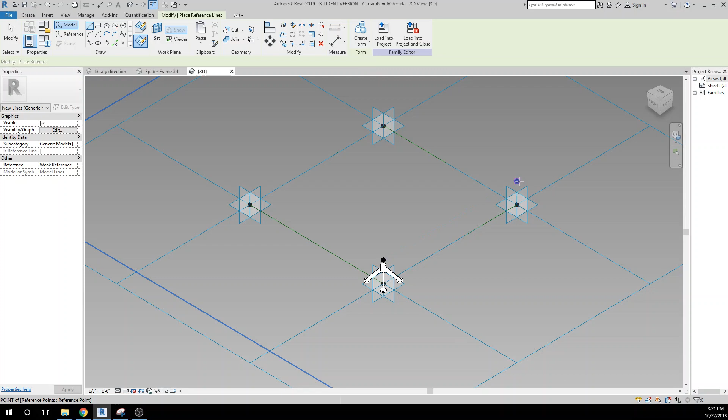Set the reference plane, place the point, grab that point, offset it by 1.5 feet. Sorry about that. Alright, and then we'll connect those 2 points. So I'll set a reference plane and then draw a line that's a reference line between those two. Let's zoom in now so we can look at making our extrusion.

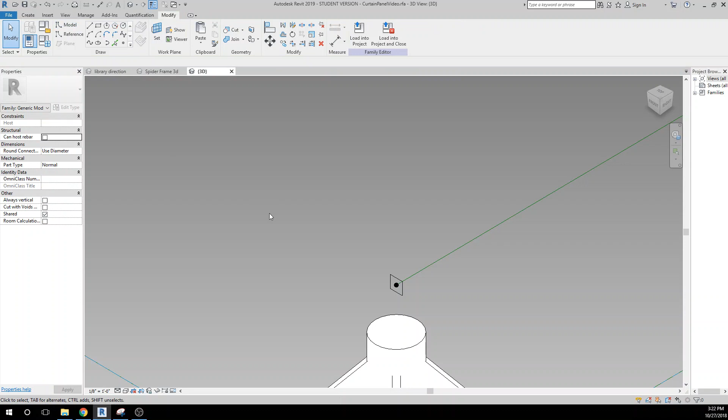We'll go ahead and set a reference plane at the end of that line. I'll zoom in a little further. And we'll make a 4-sided polygon that's easy to locate on the end of that point. And we'll make this only a 1/2 inch wide. That'll make it 1 inch nominal thickness all the way through. That's a 1/2 inch in diameter basically.

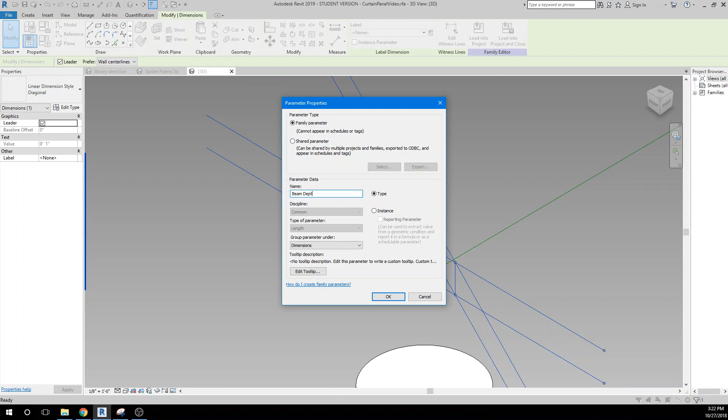We want to make this parametric. We want to be able to change the size of its steps. So first of all, I'm going to move it till it's sitting on the point. And then I'm going to grab this top and click on the dimension to make it a hard dimension. Select that dimension, and I'm going to give it a parametric value that I'm going to call beam depth. And I'll make that an instance parameter.

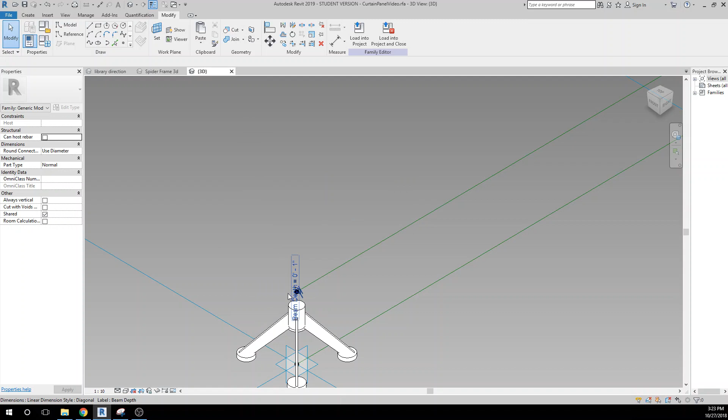And I'll just click that off, and you'll see the text is really large. The way to adjust that is just to take the custom scale tool and make this a really large drawing so those graphics become a lot smaller. And let's just check the performance of our beam depth. Let's give it 1 foot instead of 1 inch. Apply that, and you'll notice it moves up.

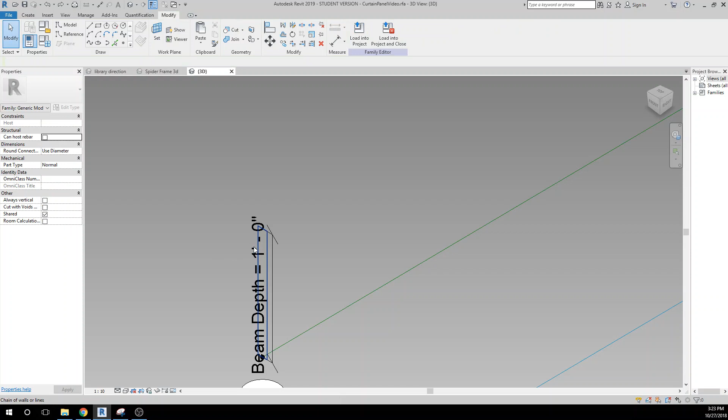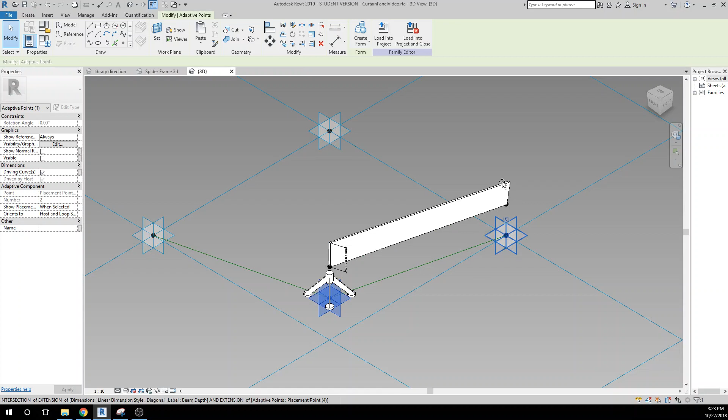So let's go ahead now and grab the, well, I'm going to slide this off because the dimension's in the way. Whoops. And I'll turn this to a reference set of lines instead of a model line. And I'll grab the long beam line, and we'll go ahead and create form, and we'll check it for parametric behavior, and looks like we're good to go.

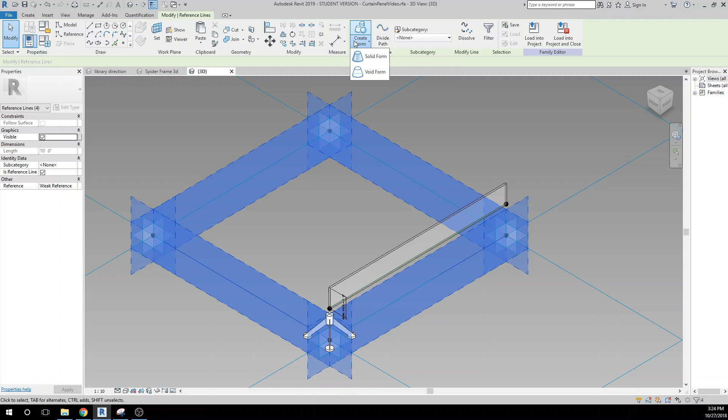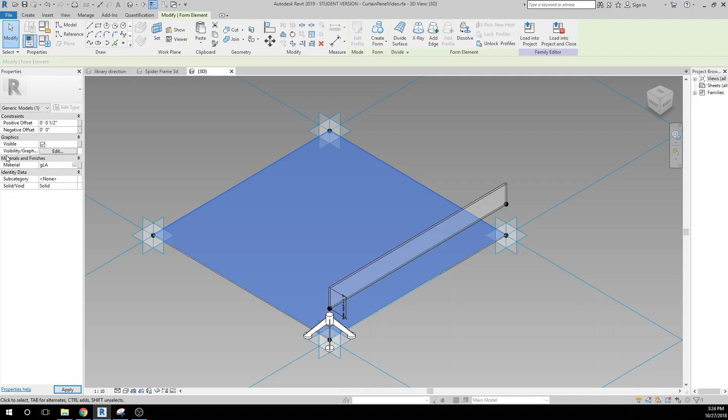I'll give this a glass value or material property, and this I'll create into a sheet of glass by extruding it out, and we'll change its offset by just a 1/2 inch instead of 4 feet. So now it's a 1/2 inch thick, and we'll give the whole thing a glass property. Alright, so now we're pretty well set to bring that into a form. So we'll look at creating that form in the next clip.